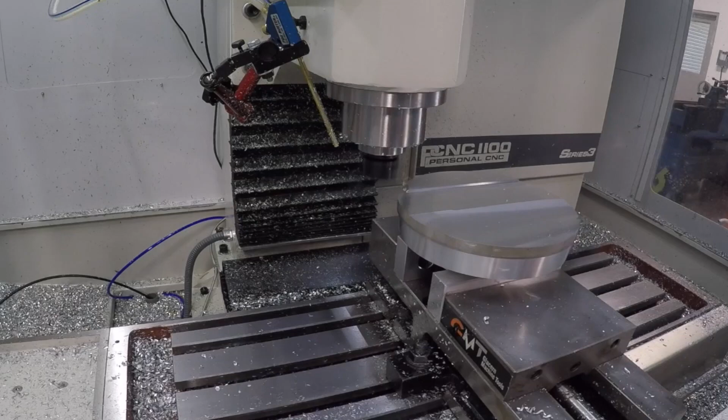I got to know Jay a couple years ago because he makes a really nice vacuum plate. They make some other stuff as well, and we use one, and I think a lot of Tormach owners use them as well. I was blown away. I actually came by around 10 o'clock on Sunday night, 3 nights ago, just to grab dinner and see the shop real quick, and I said, hey, can I come back before I fly out today? And he said, absolutely.

There's some really cool stuff going on back here, as well as some good lean principles, lean productivity. Absolutely. So right here's a good start. This is Juan, our main assembly guy. He's assembling the 914 bases, and you can see we utilize Kaizen foam.

We have all the tools we need. One of the principles of lean is that it doesn't mean you do more with less, it means you just get rid of the clutter. It's eliminating waste. So what we do here is we have all the tools required for our 2 basic product lines, and these tools we put paint on. White is the tool you need for the Smart Vac, red for our speed change pallet system. That's awesome, by visually going for it you just grab it.

We use Kaizen foam as well. What is this on the edge though? The thought is we're going to put this, I think it's like Kaizen edges, so this peel and stick. We're having someone fabricate some stands so we can take this anywhere. We thought of putting it on the wall, but we want to be mobile with it. That's the whole principle of being lean.

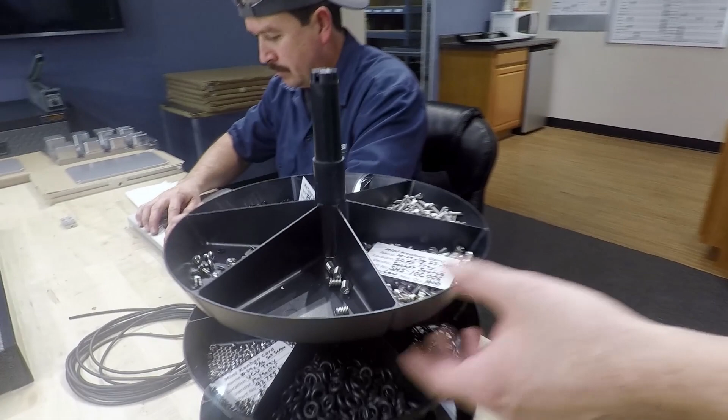Another thing that we use is Kanban cards, another lean principle. So you see here in all these different areas, these are our screws, and that is a mini Kanban card that tells us all the information we need to know about that screw. When we run out, someone takes it. If it says breadcrumb, that means we've got it somewhere else, most likely in a drawer where they're labeled hardware. Breadcrumb means there's a little trail to follow, so that means it's missing here but we can find it somewhere else, usually there's a breadcrumb pointing to it. We've got a ton of these ready to go.

It's funny because I like a lot of what I've done with lean, but I learned it through John Grimsmo and through Paul Akers, who has the Lean podcast. Paul Akers, God bless the guy, he's sharing a lot of free information, but I also feel like he's kind of smug and happy, sometimes you want to just punch the guy. He's intense about lean, yeah. We've picked and chosen what we do with his stuff. I mean, he is the single most influential person, I read his book, love it. I'm like, that's great for him, it's not great for us right now.

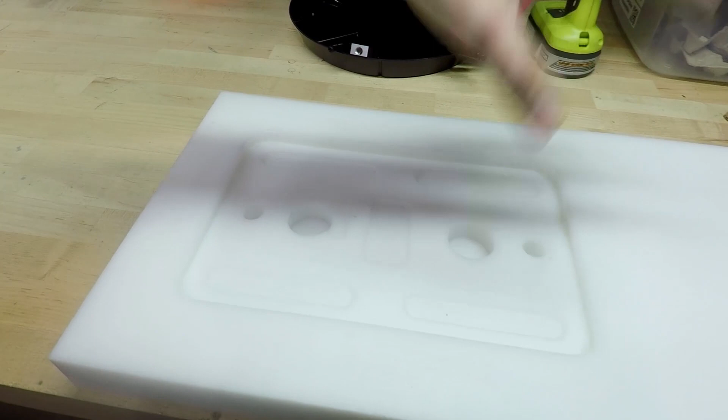We're starting this new thing, Pokayoke, for assembly. We're starting to do that because we see the value in it. For example, this is the first step, our speed change base, we put it in here, we lay out everything that we need right here. If we assemble it and there's parts not labeled or they're still there, we missed something. John Grimsmo and I were talking about making a little go-no-go, we just started a podcast. He does something similar with his knife blades. The idea is that someone who's never done this before could walk up and realize, oh, I need to test this fastener in this go-no-go.

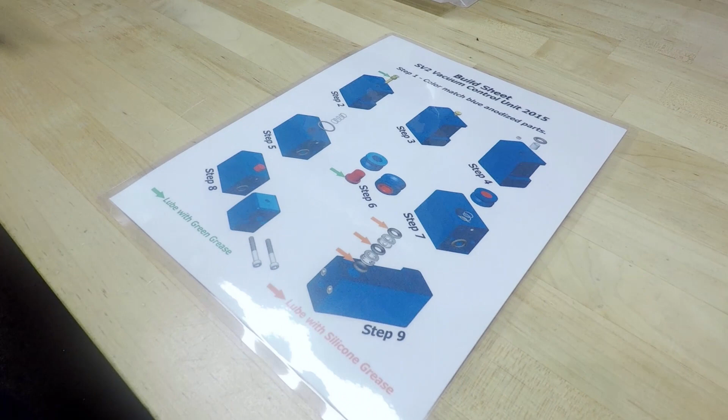I need to test this slip fit, and then it gets assembled and it's all right there. Yeah, we do that - I grew up playing with Legos, so I feel like that's my engineering background. For what we do, like building our vacuum control units, this is a build sheet. So essentially someone could walk in and assemble a vacuum control unit just step by step with Legos, and right, stop at step 11, we go and engrave it, and we come back and finish.

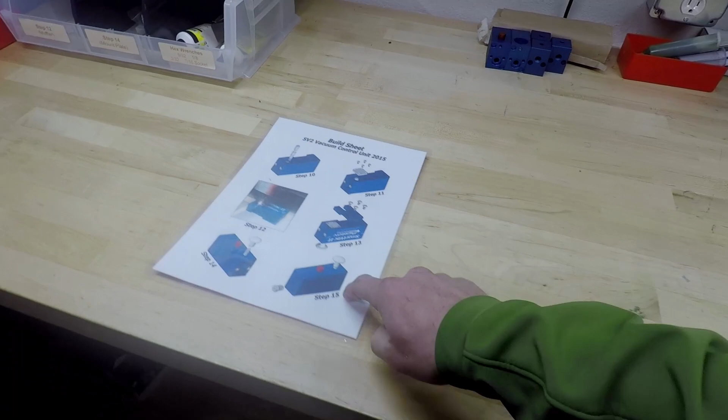Do you take the time to make this? Do you have an assistant? I make them, yeah, just lay them out. I export these out of Fusion and then just kind of lay them out in Photoshop. And then we've got the steps here. They're a little faded, but we get it. It's just everything is labeled.

For example, when we use all these springs, we'll find this bag, which has a small quantity in them, and that means that I could tell you in this bag there's 30 in there. Yeah, we reorder 250 from Gardner Spring. Yeah, there's the part number. It's awesome.

Done. I have become such a big believer in this idea - it sounds silly, but you can only make so many decisions in one day. So as an entrepreneur, as a machinist, a business owner, every time I've got to think, I have a file somewhere that has the information on the PO.

Jay showed me their box room last night, and it made so much sense - when you've got a little tag partway down through, and when you get to this level, you just reorder. You don't have to think about it, somebody else can do it. You're not worried about tying up too much money or space in inventory. It makes so much sense. There's Kanban cards everywhere.

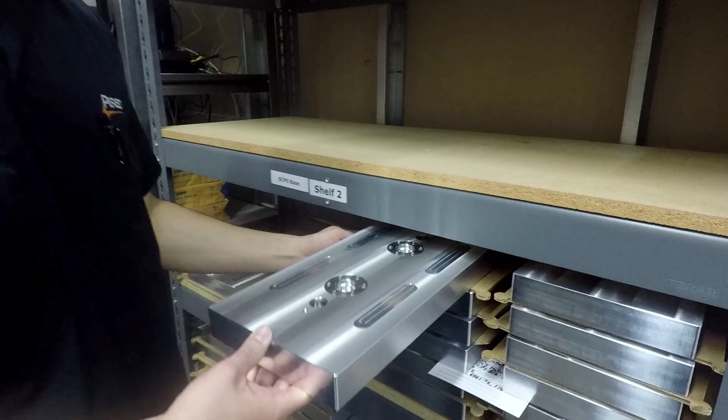When we sell this many, that triggers production. So that's awesome, because this is expensive material - like a bar is several hundreds of dollars. So we don't want to buy tens of thousands of dollars to put on a shelf. If things did slow down, I can't pay salary or payroll with metal.

So we do that - that triggers production, and then we adjust these based on historical sales. For example, we sell a lot of the 10 by 16s, so the minimum is probably like 8, whereas these 8/16s, the minimum is 4. Can you show us the vacuum plate and the speed pallet system as well, so we can get an idea what that is?

Yeah, sure. You want to see now? Yeah, let's go do it.

So we have 2 manufacturing cells. This lathe is centrally located to the other 3 machines. A lathe is essentially cutting off parts and feeding it - it's going into, usually, this mini mill. I started my business with that mini mill in a garage. I love it, that's awesome. I've thought 3 or 4 times I'd sell it and upgrade, but I can't - I'm emotionally attached to it.

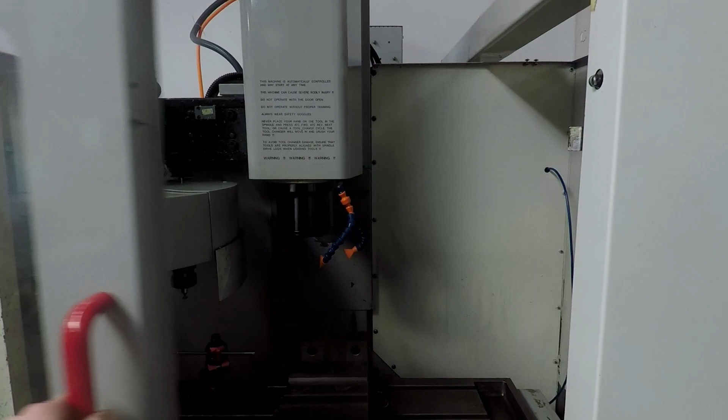Yeah, it still holds plus or minus like 2 or 3. It interpolates bores perfectly. So 2 or 3 thou? 2 or 3 tenths - .0001. Okay, wait - yeah, so it's just great.

And it's off this moment, but you still use it? Yeah, we use it. It doesn't get as much work as it used to, maybe like a couple times a week, usually if we're doing like second op stuff, cutting it off. Don't let anyone tell you these are only like second op things or cutting dovetails - we've machined, I built my business off it, aluminum, cast iron, stainless steel. It's a little workhorse.

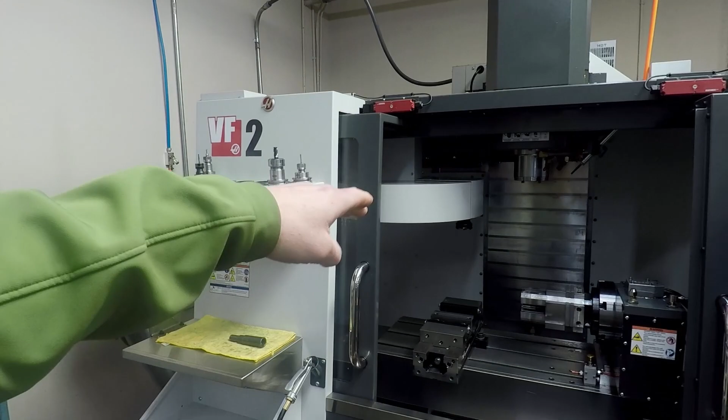So I was out here to go visit and tour Haas, and one of the things I actually took away from being here for a few minutes Sunday night was I saw all these VF2s. Some of them, this one isn't all the fancy - he didn't get the SS, he didn't get the fancy tool changer, and it kind of made me realize I would much rather have less expensive machines that are able to be more specific to certain jobs or operations, especially when you have a product line like Jay does, than have one really high-end machine where even if you're efficient about it, you've got to swap out jobs, swap out fixtures, tooling.

Yeah, but this is awesome - 2 slow machines are faster than 1 super fast machine. Right, like none of our machines in here, with the exception of one next door, are super speed. They don't have side mount tool changers, because we're doing something different.

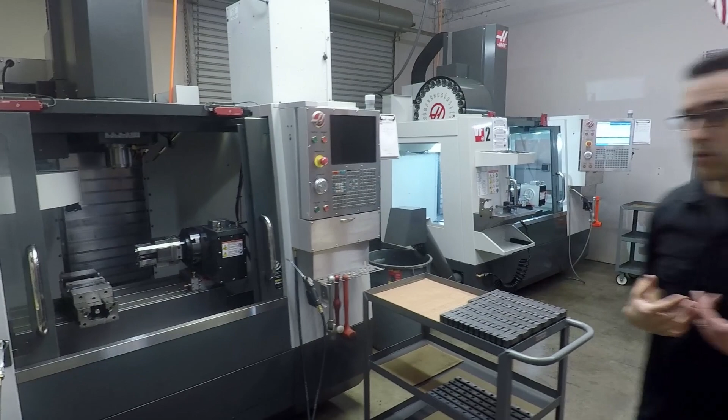We're always going to leave tools in that. This gets a lot of tear ups and breakdowns. So now it would be hypocritical for us to manufacture our products without using our products.

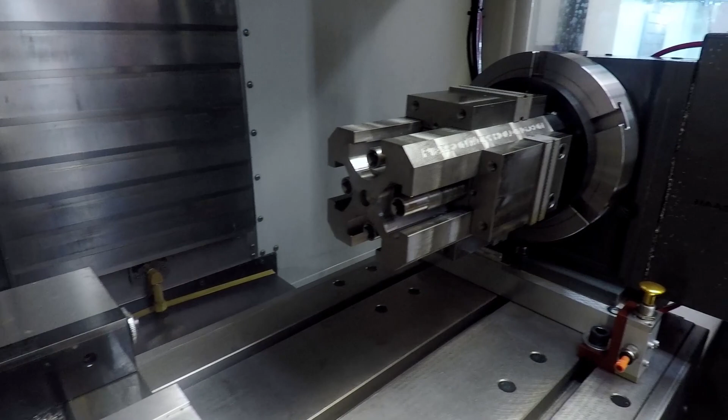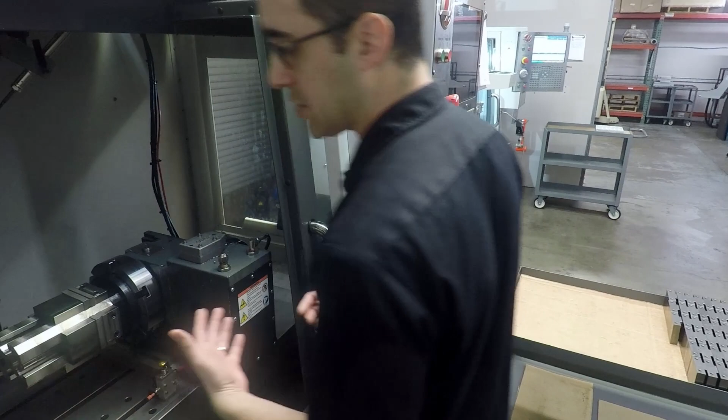So for example, this is our newest product, the rotary vise. Now that's a prototype, but we've been banging on it for about 2 years. We're able to hold 4 parts in a 3-inch width, so it's the equivalent vise space or real estate as a double 6-inch vise. And then we're able to access multiple sides.

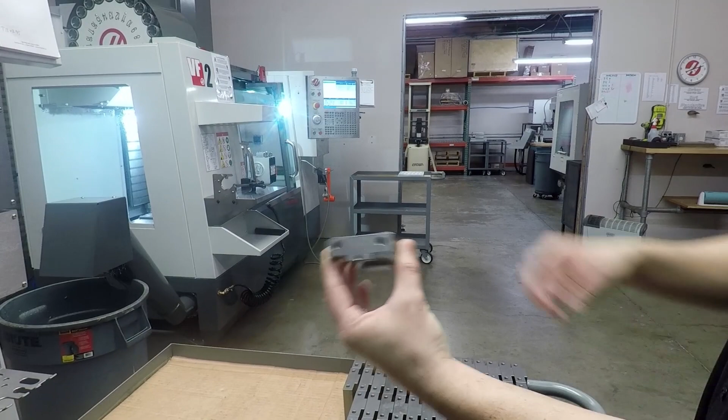So for example, we just finished up this run. This is in cast iron. This is the jaw to the rotary vise itself. If you can see, we machined it. Op 1, flipped it. Op 2 for the holes. Op 3, hole, drill, and tap. And then we put it in the mini mill, or no, we ran these next to each other. Deck it, Op 4.

But you say 4 ops, but it's 2 setups. Yeah, it's 2 setups. That's awesome. Yeah, it's actually 1 setup. Well, it's 1 setup here, 1 setup here, and then you just duplicate it.

So Fusion's been really great. So you're using Fusion with tool orientation to do the rotational work. It doesn't require tool orientation, which is ultimate. It actually requires the basic one, which is just circular pattern. That's amazing, so you program off the center line of the vise. Yeah, and then it just duplicates.

So this is going to be like your new 3rd major product line, you think? Yeah, it's going to be launched pretty soon. Yeah, we've got the finished one. This is pre-production, it's ready to go.

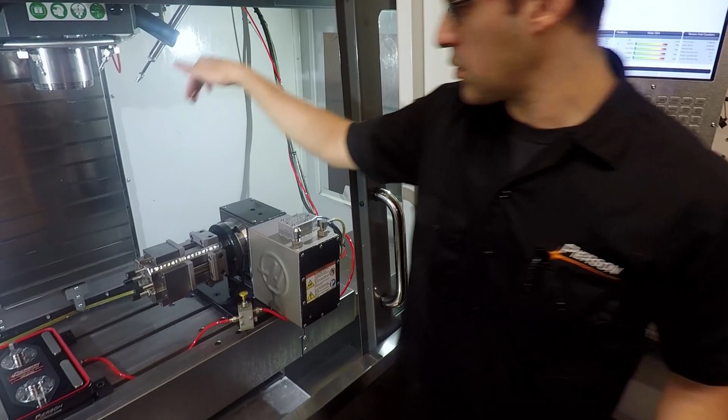Serrated jaws. The nice thing about that is it has serrated jaws on top because when you're machining on the side, you need a lot of clamping pressure. It's one thing to put downward pressure in a vise, but when it's sideways, absolutely, you need serrated jaws.

Are you making the jaws? Yeah. And these can be flipped on the other side. If you peek in here, there's a flat side just in case. These jaws can also be flipped around 180 degrees, so you can use this flat side as well. Oh, interesting. And the serrations mean you don't have to pre-dovetail your part.

I've never understood dovetailing. It's proven, but it adds like an extra op, so that's an extra step. I guess you can buy your stock already dovetailed. You can, but I can't imagine that's as cheap. Yeah, it's a die. So then there's our speed change pallet system.

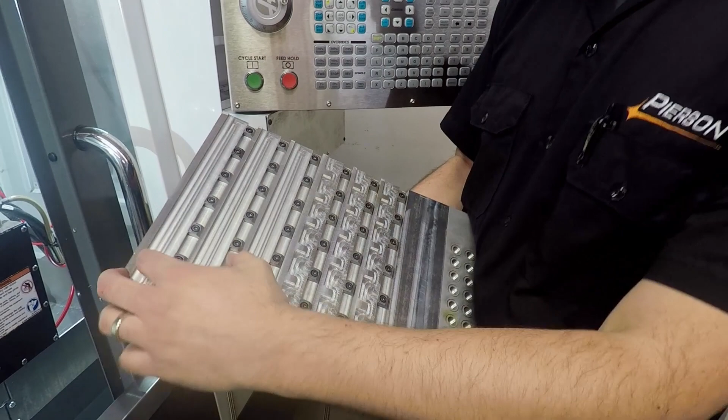Here I pulled out a pallet. So usually there's some small parts that we make that go in the bottom of the vacuum control unit. We can throw these raw stock pieces in, looks like a 7, 14, 21, and then bring it from here to this station, Op 2. We have 2 of these, so the operator is loading these outside of the machine.

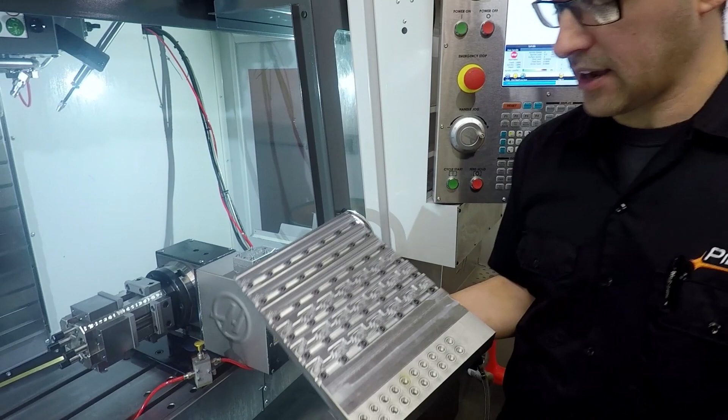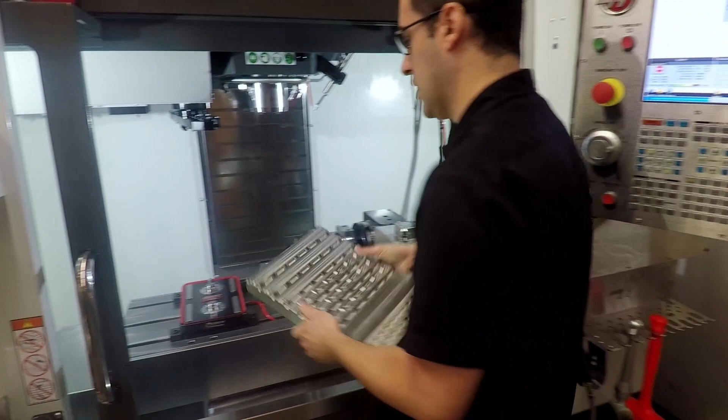Those are the pit bulls for Mitee-Bite? Yeah, exactly. And then we have mufflers that go on the side of the vacuum control unit, so we just screw them into here and make 20 at a time. Just 3 different jobs going on here. Op 1, Op 2 on a separate part. So the idea is you just pop them on like that, then hit the air valve, it locks it down, and it's being held with 3,000 pounds of force.

That's awesome. So we've got one of your vacuum plates. It does bleed some air. Does this? This does not, so once it's on, it's on. We could cut this with scissors and it would stay locked, so if you're pinching lines or an air drop or something like that, it's still going to stay locked.

It's fail-safe. This is exactly what we're realizing and doing right now with our orange vises. We're realizing that we've got this one machine, this VM3, and my life will be better if I can keep it running more. So I've got to do offline parts swapping. I can't sit here at the machine and handle, you said 7 times 6, 42 screws, making sure they're all right and level and flat.

The conventional thinking is you make a fixture plate and put it in the machine, and then the operator's bending over in an uncomfortable position while the spindle is waiting. Spindles can't wait in this day and age, so that's where you just pull it off, load, go, get another, boom, back in, hit start.

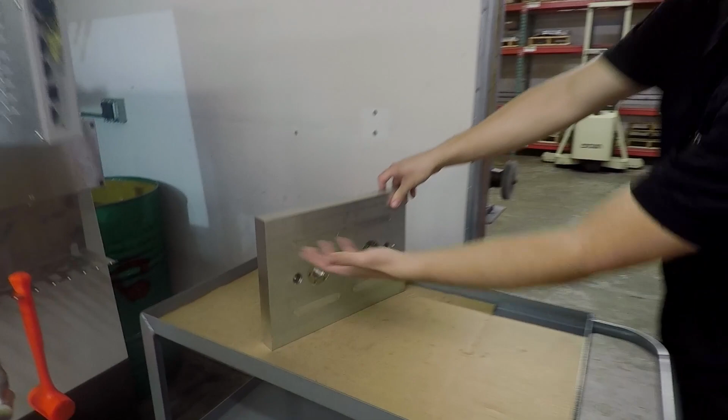So in 15, 20 seconds, we're just swapping out 42 parts. So I buy this as a blank from you and then just machine it in place? Yeah, exactly. We machine the bottom side, all the locking components, bushings, and everything we make here.

And then it comes as raw as possible in extrusion. We don't take away any material. We want to give the maximum amount of material to the customer. How repeatable is it? It's repeatable to 3/10 thousandths. Got it, pretty dialed. That's really cool.

I gotta say too, we like to keep a clean shop. This shop is really clean, and here's an interesting takeaway. Jay said they don't clean the shop at the end of the day, they clean it every morning. It gives you an opportunity. At the end of the day, no one wants to clean up, they just want to go home.

I get that. So what we do here is 3S. One of the lean principles is 5S, but we 3S to keep it simple. Sweep: clean up junk that's not needed. Sort: if things are out of place like this, it has a place somewhere. And if it doesn't have a place, let's take time to standardize, create a Kaizen foam where we can put it. All this stuff, degreaser, shop bench, tape, drill, all that stuff, so it has a place.

So I always say we're always 50% there. We make strides, but we're still 50% there. I like that idea though, because I've been telling the guys, Jared, Noah, and me, 15 minutes before you leave, stop what you're doing and clean up. It works, but it doesn't, because I'm always rushing to finish, especially me, to get out the door. And I love this idea of starting the morning with clean up.

One thing your viewers won't notice is that if you walked in here, it doesn't smell like a machine shop either. Right, so we have mist-away collectors. These things are awesome. For example, in the smaller volume, the Doosan and the mini mill, we have a plenum that goes to both. This is a new machine, it's only been here about a week and a half, so we're still setting it up.

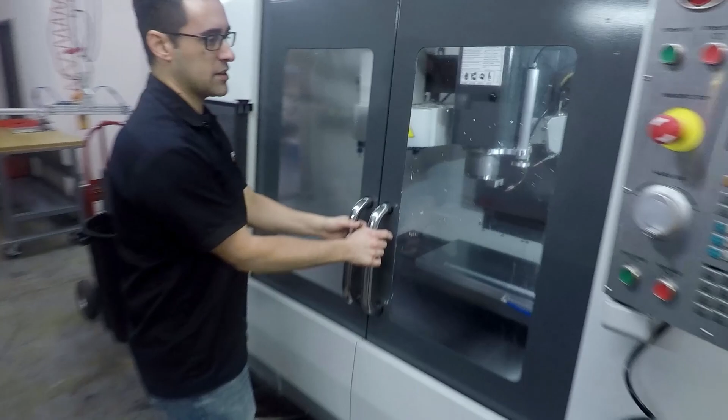This is so cool, folks. Take a look, this makes all of our vacuum chucks and related products. Right here is our 13 by 30 inch plate. This is the bottom plate we're machining on one of our fixtures that goes on the bottom. So this is the product you sell. Yeah, you're using it right now to make the bottom plate. Again, we use our product to make our product.

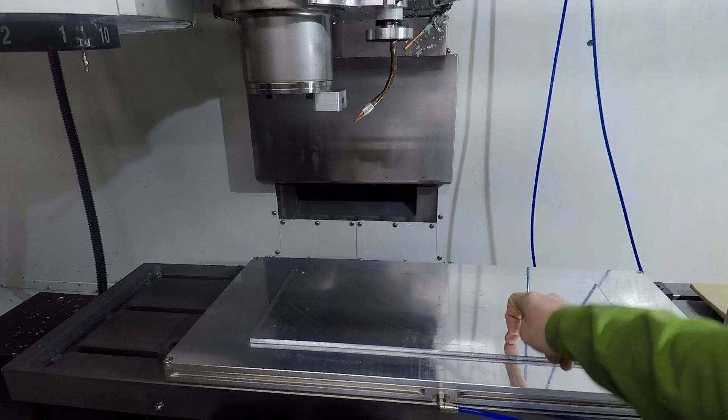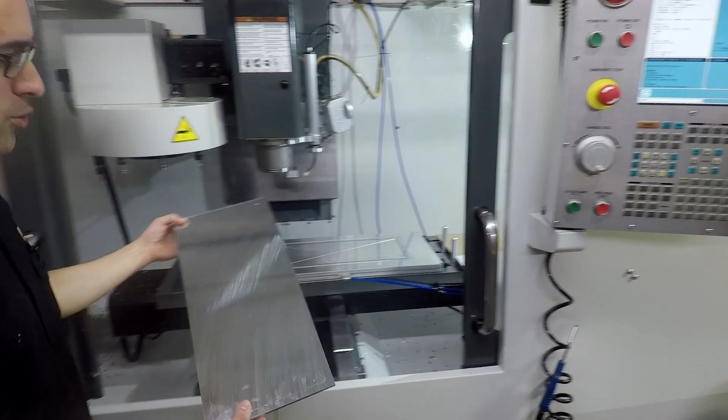And then this is the thing that's probably caught most people's eyes. This bottom plate here is a relatively low dollar item. It's one operation: cut the perimeter, drill holes. There's no second op. This is a part we don't want to commit a lot of labor to, so we've developed this part picker.

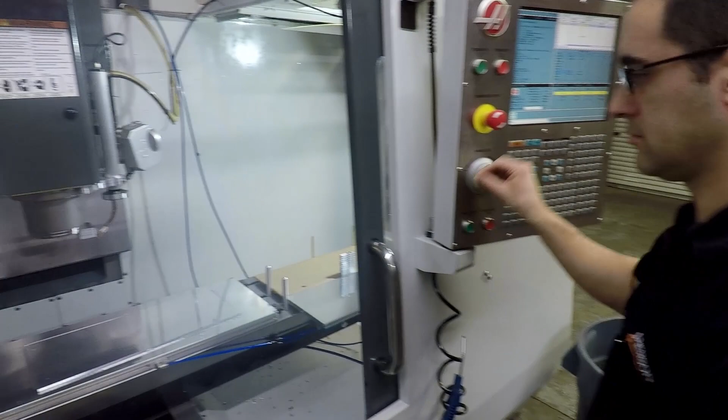This is so cool. I already told Jay, because we're building that little 440 automation system, but I saw this on Instagram and I will absolutely be blatantly stealing this. So we're setting this up to run these. This is the start stack and the finish stack. This is the part picker which goes in, and it's all pneumatically driven.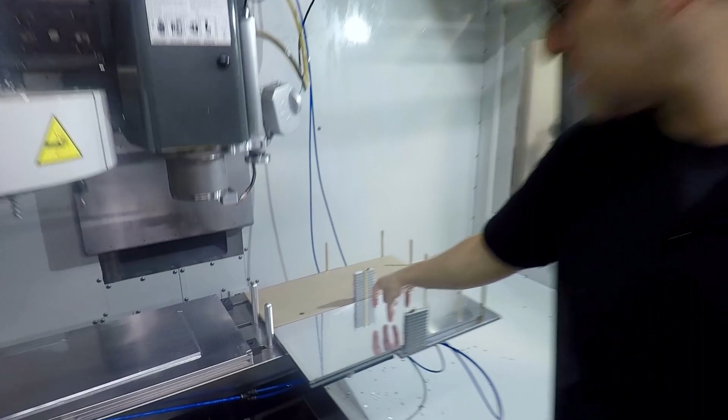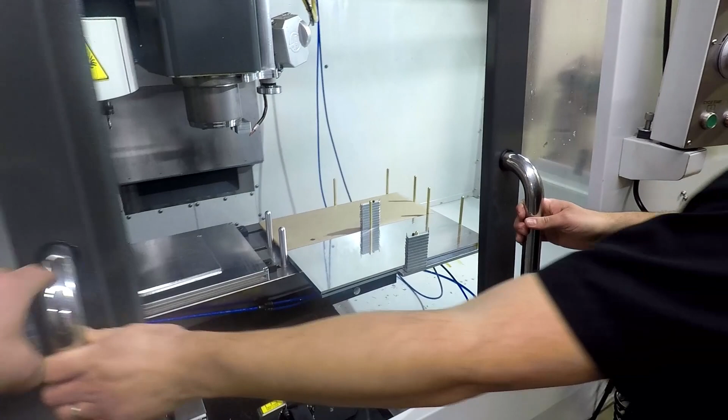It pushes down, there's a vacuum cup here that goes down and picks up this part, lifts it, puts it down, it machines it, then it picks it up again and puts it in the finish stack. Can you show us? Yeah, absolutely, let's see. Does it matter that it's crooked? Well, we'll just put it here. Okay, yeah, okay.

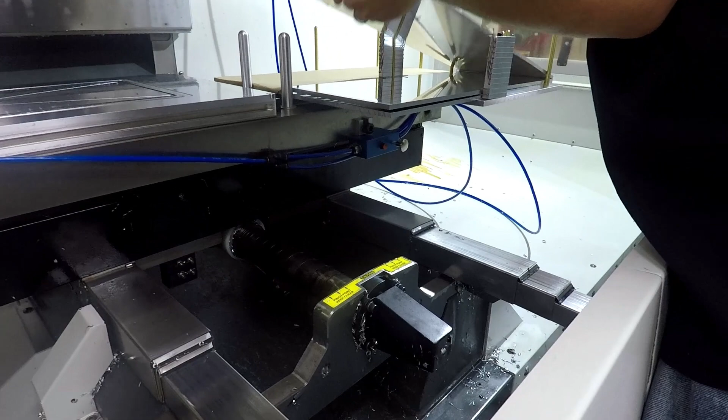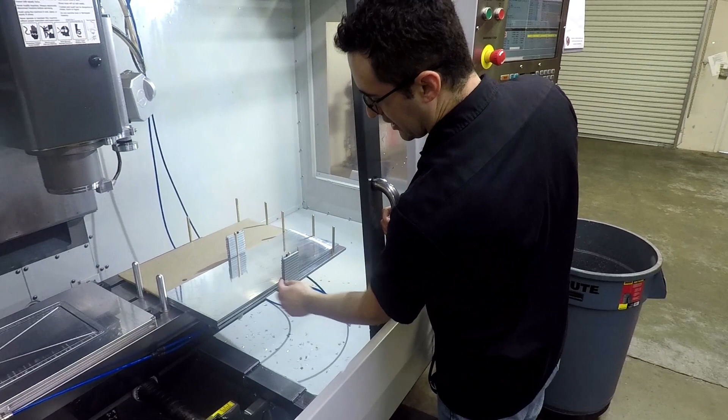I'm curious what those little teeth are on the sides. Oh, that keeps them from suctioning to each other. The first time we ran it, it was picking up 2 or 3 stacks. Oh, okay, that's not good. So we made these little arms that go down and fold out of the way. I don't know if it'll work, but let's see where he's at. I put him on the spot here.

So you just wrote a pretty simple G code that uses one of the extra M codes in the Haas? Yeah, it uses M codes to activate one of 3 relays. We have one for this, one for the vacuum chuck, and one for the blow-off nozzle, so 3 relays operating solenoids. I didn't even think about the fact that I could put my vacuum plate on an M code. Exactly.

That's cool. Yeah, all right, same thing. So this is a single operation machine. We keep this pretty much set up to cut our pallets for a speed change pallet system. But right here is an interesting thing - we're doing the same concept with a part picker, this time with magnetic.

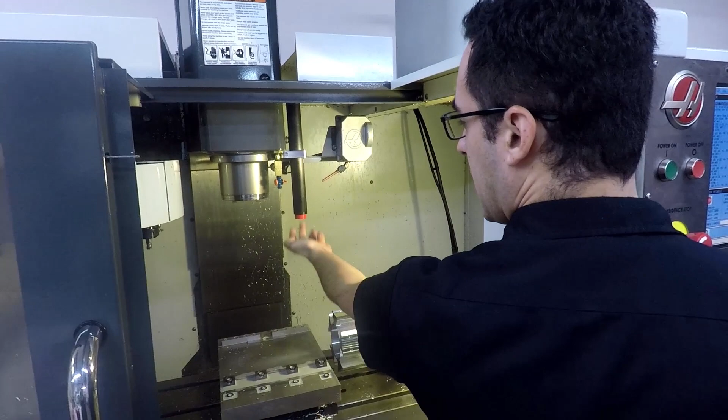This guy, yeah, this one. So this is a 3D printed part. I pushed in some neodymium magnets, and it'll have 2 bed clamps, like the toe clamps we use for our pallet system and our vacuum system. Again, low tolerance, low dollar item - we don't want to commit any labor to them, we just want to load as many as possible.

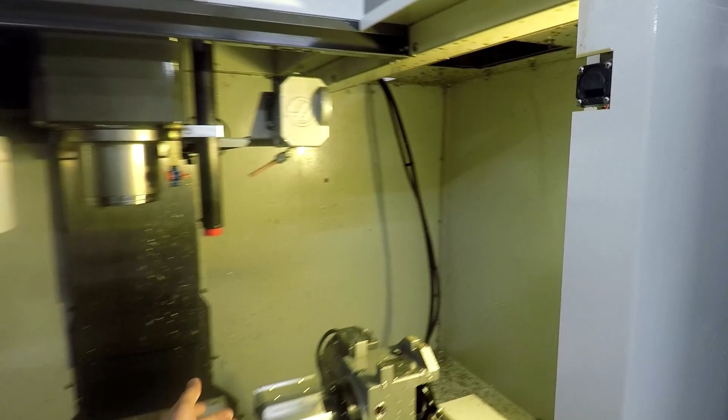It picks up 2, goes over to a hydraulic vise, clamps them, finishes, slides them back in, lifts them out, indexes, does it 5 times. And it's not an electromagnet? No, so it's just pulling them off - yeah, we'll have neodymium magnets in there. And interesting, so it will index.

I love it, yeah, and then when you're done you'll be able to pull that off. This is awesome. So I'm sort of new to this - that's the Haas 5C indexer. So it's not meant to machine while it's rotating. It can, but it's more positional.

Got it. And you can't really machine way out here if you have a large fixture. Right, like we were kind of pushing it, machining these slots and things - it's a lot of material. Oh, you made it in place. Yeah.

So then you could just literally walk up to the machine when it's done, shove a new one of these in, hit go, and come back 5 hours later. Yeah, that's the thought - just hit start, walk away. It stinks to stand there in front of a machine as an operator. I don't want to do it, I don't want my guys to do it. I want them using their brains, their legs, everything. So if we can have them load and unload offline, it just increases productivity.

Crazy thing too, Jay owned a robot, and robots are cool, but it kind of reminds me of the Fifth Axis video Rob Lockwood did - don't use Fifth Axis if you don't have to. Why would you buy a robot when something this simple, this elegant, this self-contained can work? Yeah, I mean, I got caught up in the whole thing - robots are the future, they're going to take over. But I found we can do the same thing with our Haas machines and a little bit of ingenuity, without the setup costs or anything associated with a robot. So cool, it's worked well.

I took a little hit when I sold it, but like I mentioned, I'm a college dropout, I'm self-taught. So that was worth a semester of college for sure - cutting edge robot technology, so I'm okay with it.

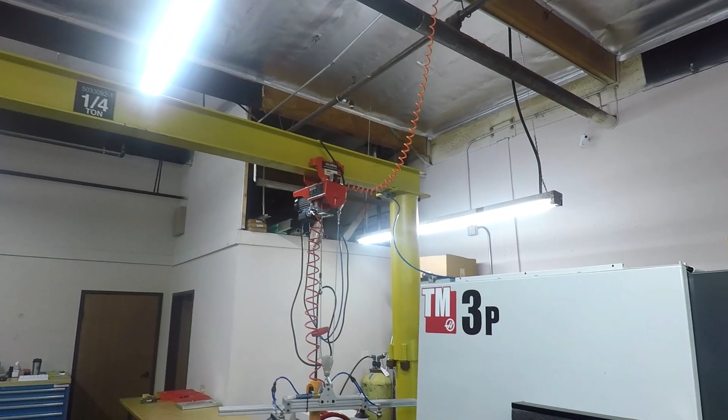So simple, I've got to do this in our shop. Simple jib crane - did you buy it? Yeah, looks like it, but look at this little system. Nothing crazy, some 80/20 extrusion, a winch you can buy from various grades or qualities, and boom.

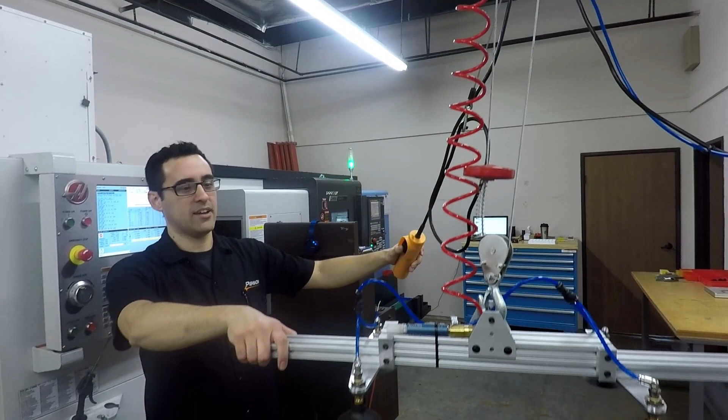It uses the same vacuum technology we use here, and it picks up our large plates. Our large vacuum chucks range from like 20 to just under 50 pounds, and we don't want to be bending over picking those up. So we'll go down with this, turn it on, lift it over, swing it in, and it's a back saver for sure. Amazing though - I love the simplicity of it.

Alright, so what's going on here? Okay, one of our newest machines. Wait, the VF2SS is only a week old - this can't be newer. Well, this was December, that was January. So right, we're just trying to keep up.

One of the things is we don't want people standing in front of a machine. This is a dual spindle Y-axis live tool lathe. Right now it's making these little guys we call the VCU cone. Is this part of your Venturi system? Yes, exactly - that's the heart of the system right there.

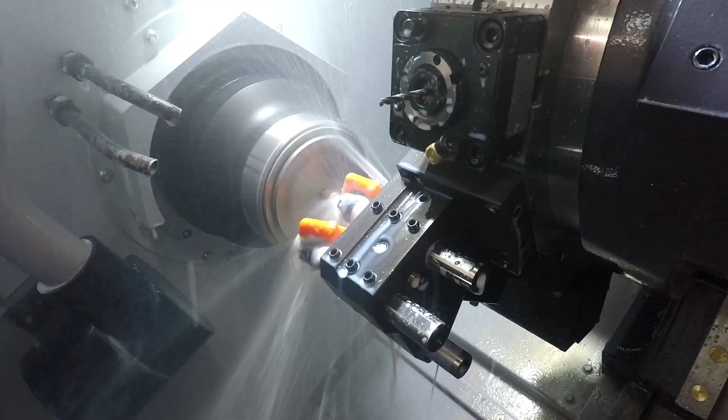It's a small part. It turns it, it picks it off. I think it faces the back side. Yeah, oh it does - wow, that's awesome. That is not slow. Oh, there you go, look at it.

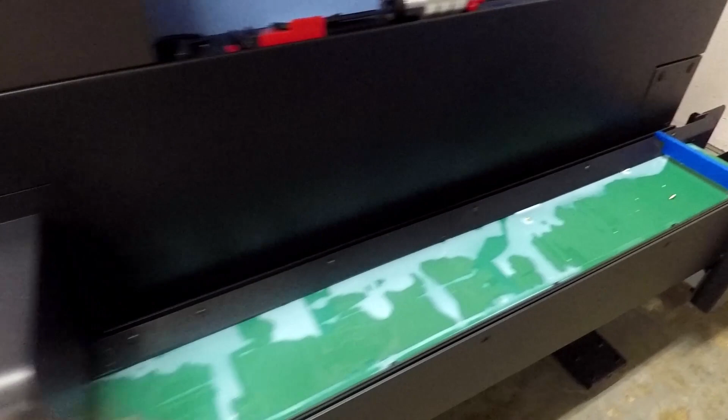Conveyor belt. Oh there it is, yeah - they're on their way down. Right? Huh, yeah, that's super cool.

So the subspindle went in, pulled the part out. Yeah, it's still there kind of, you can see. And that subspindle position goes back. Boom, there we go.

This is especially in brass or aluminum - it's a machine that we set up and it runs and runs. We don't want to overproduce, but when you get done with a complicated setup like this, we're going to run a minimum 6 months of inventory. Most likely we're at about 9 months or a year. But that's nice, you don't have a ton of money tied up in that either. No, we don't. Right, that's a small part, but critical.

No bar feeder, just a tube, so you can hold a 3 or 4 foot stick - it depends on the length of the part. Like a 3 foot bar, we're going to get a ton. And we also don't want to run a ton and get halfway through and find out a boring bar broke. So we're inspecting like every 10th part, and we have a system for that.

You'll see Lista cabinets everywhere - we love them because they're heavy duty. They hold a lot of our fixtures. This rolls around, and all the fixtures we use to make our vacuum chucks are in here. Other brands just don't hold up. There's a couple pallets for making them.

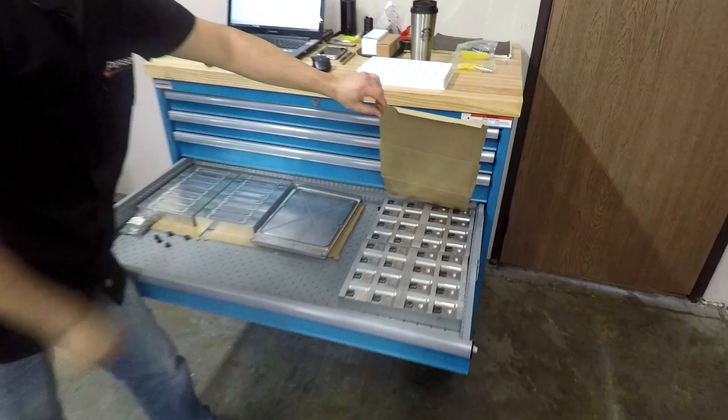And then these nice little trays - a lot of people use egg crates. What we're going to do, this is my idea for this week: we're going to put red dots every 10th part. So when you put a part in and it hits a red dot, you stop and inspect. So we're not blasting through parts without inspecting.

It sounds stupid, but even for us - we're not this fancy - when you pull parts off a machine and put them in order, it's so easy to see a height change or a finish problem because you're comparing finishes. If something's wrong, you can go backwards and figure out where you need to throw them out or rework. Because it happens - so we inspect part number 10, it's right, 20 is wrong, we're most likely going to throw away that row. There's something wrong in there.

I gotta say, man, it's not a huge shop - they don't have the fanciest, most expensive machines, but they're making it happen and the parts look dialed in. Yeah, I mean space is kind of, well, one of the 8 wastes we consider is transportation. If we're moving stuff across a big shop, that's not efficient.

So we like to keep our raw material - it comes in here, we instantly cut it up and put it in one of the holding spaces, 914s, 1313. These are all the different pallets. We want to try and keep these empty.

What's the point of storage racks when they're empty? Well, we don't want to store up a lot of material. Here's a cart - we're running that, it's scheduled for the super mini mill. We're going to run these and probably process all of these by the end of the day.

Before we wrap up, can you show that poster on your production stuff? Yeah, absolutely. Is that something you're willing to share? Yeah.

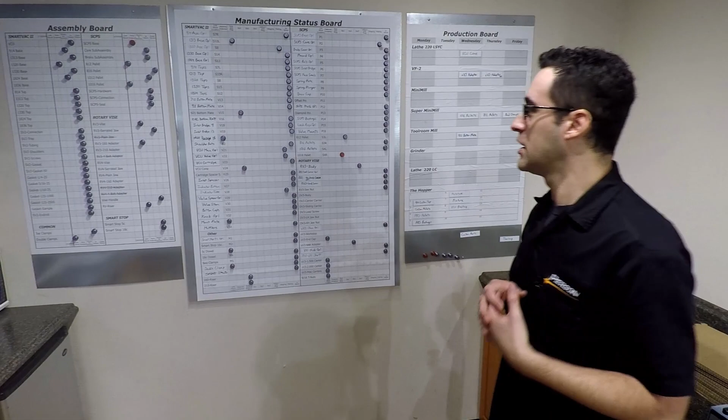Yeah, in most shops - now we are essentially a job shop with one customer, so these are all the components that we make listed here. And then it's a natural progression.

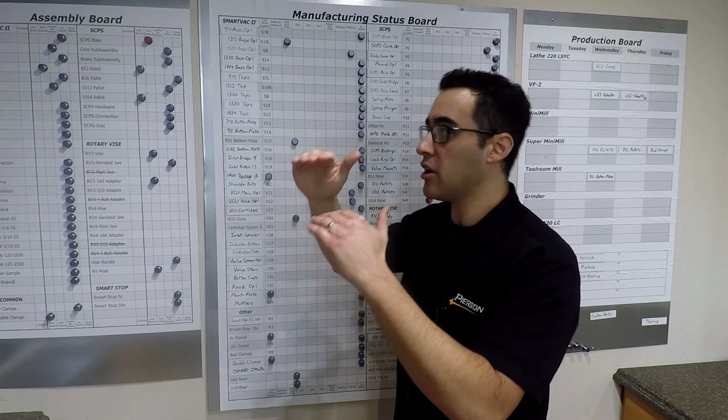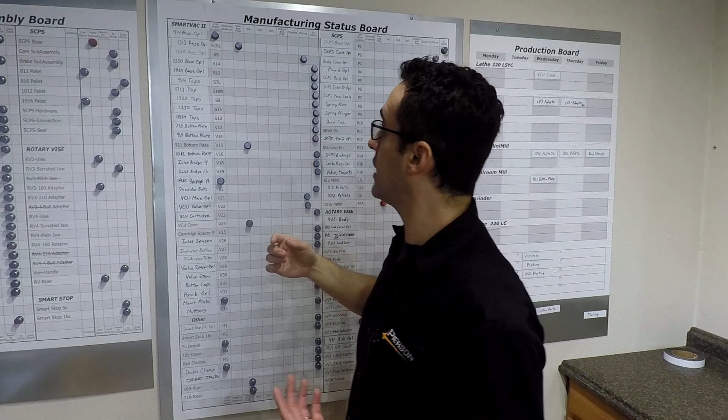We know that the 914 bases, we are above the minimum on the Kanban, so we consider that in stock. When we go low stock, just put it there. Now anyone in the company can move these pins - I don't have to be the one doing everything. So if I walk by at lunch and I see low stock, someone moved it, well I'll go order some material. And then saw and prep, and then we go through the progression - deburr, prep, staging, plating.

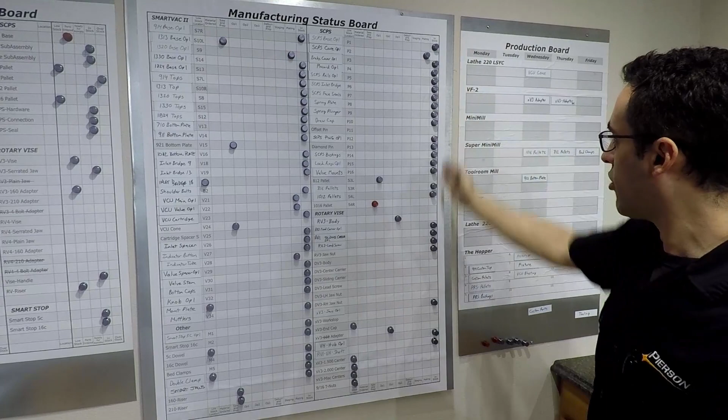And then I say, when the pins are all in stock, we go on vacation - we're sipping margaritas at that point.

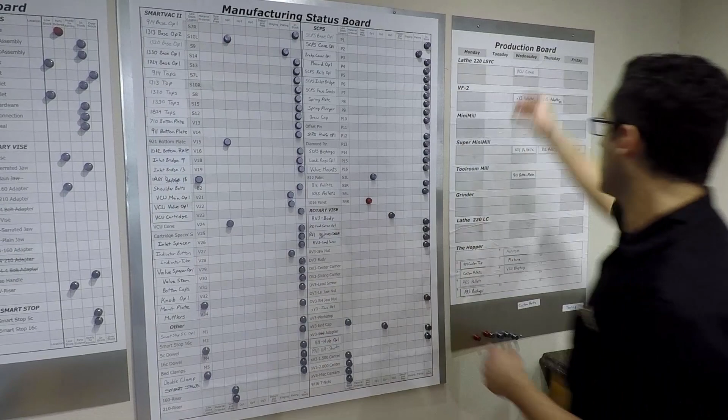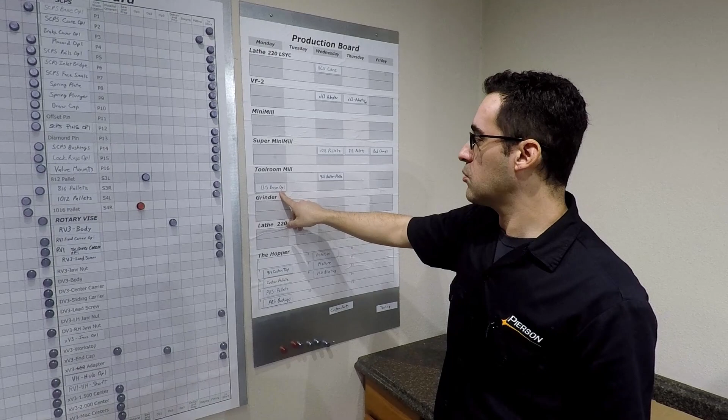So say, for example, 1313 base is still at saw and prep. When it goes to op 1, we're going to pull this and probably put it in - it might be ready next Monday. So this is Monday through Friday of this week, Monday through Friday of next week. It'll probably be ready to go Monday next week. We know we're doing a decent quantity, so we'll put op 2 on Wednesday of next week.

So that's just - I know there's software to do this, but this is the most simple way to do it. I've been using restaurant tickets, just because it lets me write on a piece of paper, take notes, stick it back up. I don't like whiteboards, erasing - yeah, we don't.

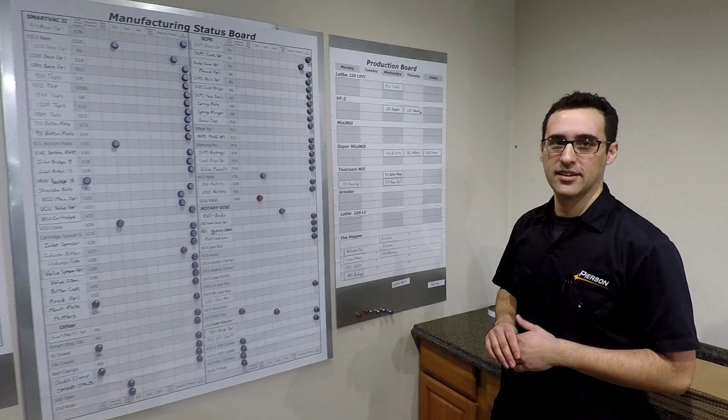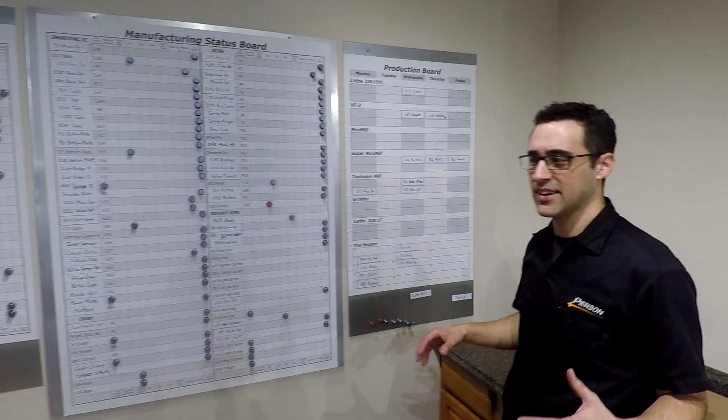This is phenomenal. And I'm inclined to say this is a little like OCD, but I get it. I really do. Yeah, it's OCD to think about it and set it up, but the goal of the company is to be as simple as possible. Like I told you the other night, I was stressed out - mind-numbing stressed out - twice last year.

That's phenomenal - versus twice a week. Yeah, exactly, because we want to go home to our friends, our families, and just have fun. We don't work weekends, we don't work nights, we don't work overtime, and we are paid well because of our efficiency.

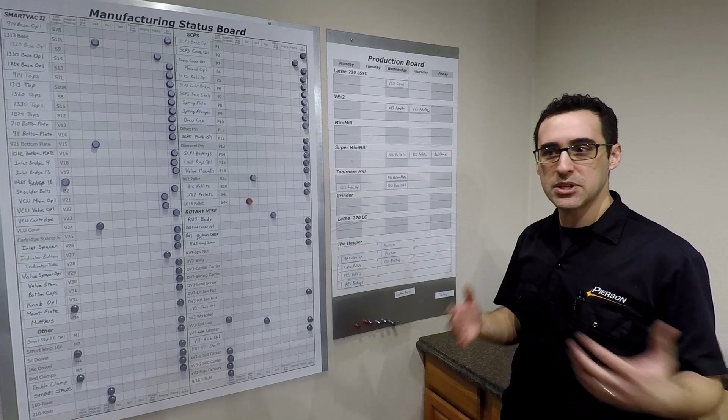When I hired John, my lead foreman, we had 6 months of chaos. I said, this can't be right - I've been doing it by myself, I got another guy, now we got 2 guys that are crazy. And so that's when we started embracing lean about 2.5 years ago. And we're always making constant improvements.

The assembly board, that's what Juan's doing. He's working on the 914 bases because he walked in and saw that these are ready for assembly. I love it - you don't have to. This is your boss. Yes. It's awesome, I love that.

Yeah, I say it often - I say I may be the owner, but I'm not the boss. The process is the boss. And we all establish the process together, so it trickles down - we're all kind of the boss.

This is a good little example - again, I know some people are not into lean, and I think some of that stigma comes from big companies that just think they can hire a lean consultant to come in and fix all their problems. But when you see it start at the smaller level, it is amazing. And look, I am too stressed too many days, and I start to see stuff like this, and I think about how much happier I am - even with the tool carts we've done in our shop and our shop organization video. I get it. Lean really has become a way of life around here.